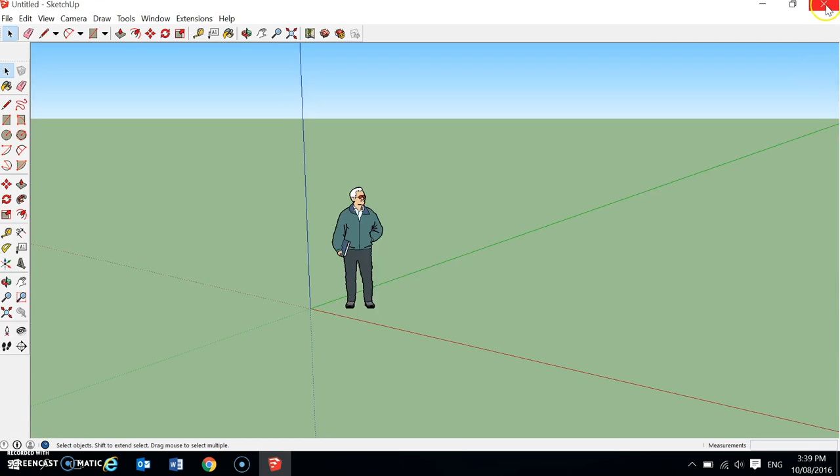Oops, sorry, that's chosen the wrong one. If that happens, you need to launch it because it jams, and then close it and relaunch it. There's some weird glitch with the software, so we'll go do that again.

Choose template, click in this little scroll here, and you're looking for the woodworking millimeters template. Select it, and once selected, go to start using SketchUp. Wait for it to load.

You'll notice that if you use your wheel, it will scroll in and out. If you squash that wheel down, it'll allow you to orbit around the workspace. You'll also notice you have a green and a red axis, the X and the Y, and a blue one, which is the Z. The green and red are your two horizontal planes, and the blue one is your vertical plane.

I'm just going to start by drawing a rectangle. Click in Shapes, click once and drag. You'll notice in the bottom right hand corner you should have your Dimensions tab, which gives you all the dimensions you need for your drawing.

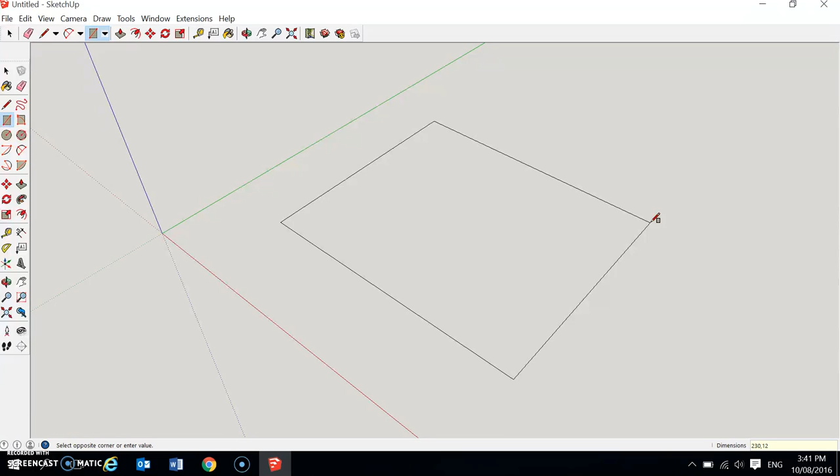I'm going to type in the dimensions. I'm going to make mine 230 millimeters. You can see the numbers appearing in the bottom corner. I'll do that again: 230, and then we're going to separate that by a comma and put in, say, 125. Then press enter and it draws the rectangle.

It's pretty small, so we're going to click on this zoom extents button here and it'll zoom right in so we can see our drawing.

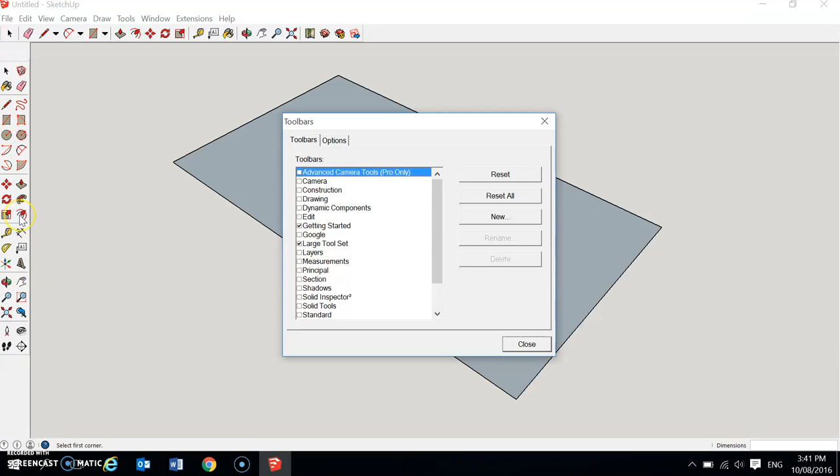Okay, the next thing we're going to do is click on the offset command. Now if you don't have that there, what you need to do is go to View, go to Toolbars, and if you click on Large Toolset, you can see my large tool sets here. It'll appear in this little column here. Just click on Large Tool Set and then close.

Alright, so I've got it in two spots. I'll choose this one, Offset. Click inside the rectangle and drag in, and then type the thickness of the timber you're going to use. In this case it's 12 millimeters. Press in 12 and press Enter. And now you've got the thickness of your timber for the box.

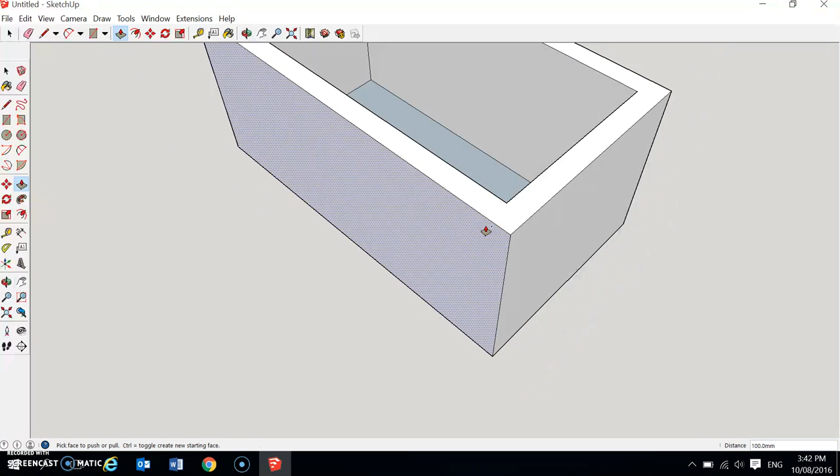Now we could just pull that up now to the height, say it's 100 mil. But we haven't actually detailed any joinery and we want to do that. So I'm going to go Control Z to undo, and I'm actually going to draw that in.

So I'm going to pick my line tool and draw in my rebated butt joint. I'm just going to go on face, connect at the end point, and type in the distance, which is going to be half the thickness of the material, which is 6 mil, and enter. Type in the distance and enter, and then click on the end. So there's the first part.

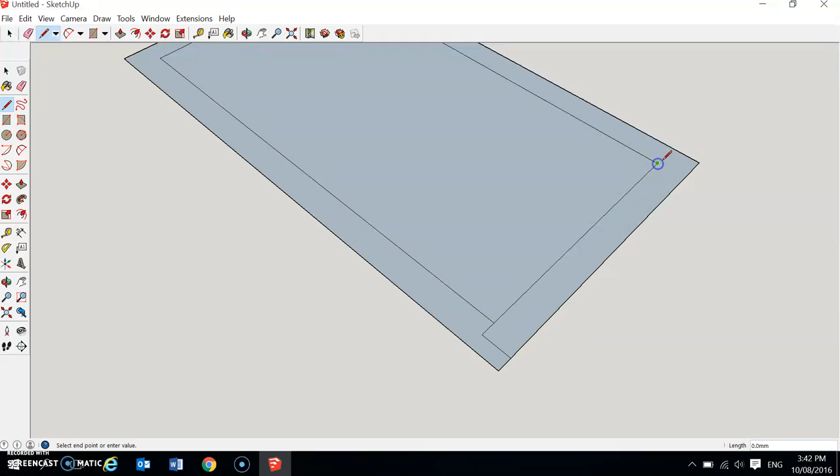I'll do the same on here. Now it should lock in at 6 mil because it defaults to your previous settings. So in this case it locks in. You can see it gets attracted and gives you an end point. I can do the same on this end as well. So I'm going to zoom in.

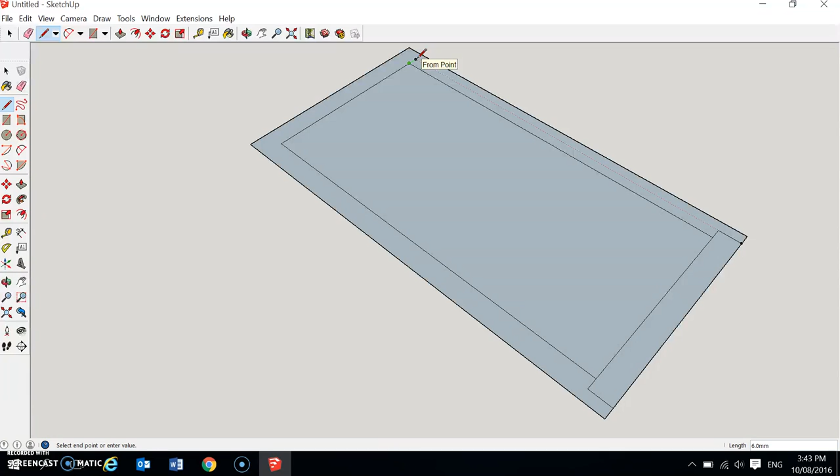From point, click. And I'll do the same at this end, on face, 6 mil, so it's giving me the same distance. So now when I go to pull up, it will pull up individual components, so I can pull them as separate pieces. Okay, I'm just going to undo that.

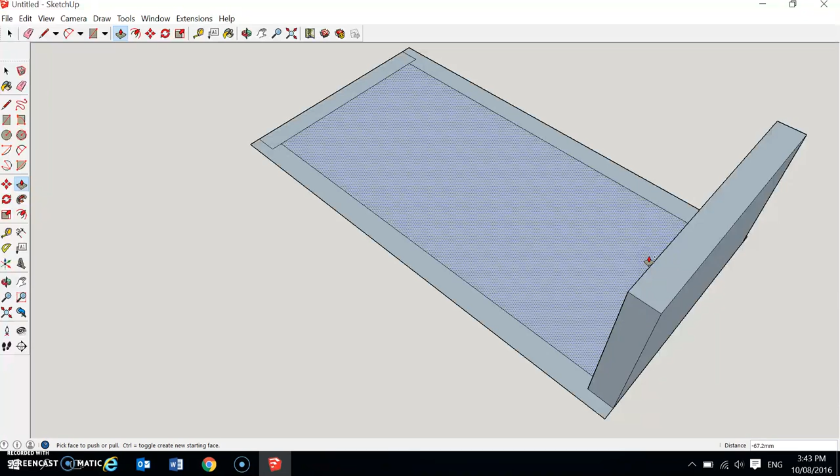I'm going to type, pull the two edges up first, 100 mil, enter. 100 mil, enter. And I'm going to pull up the end one, 100 mil.

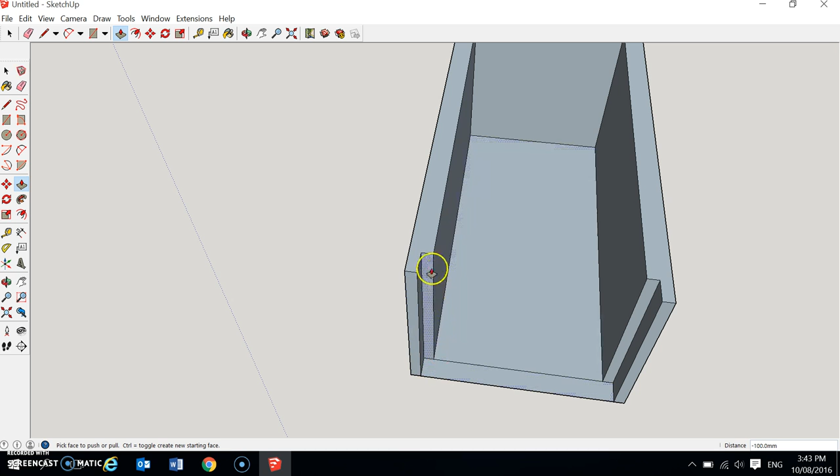Now, if you wanted a sliding lid, obviously you're not going to pull up all the way to the top because you want the lid to slide in and out. So I'm just going to pull it up 10 mil from the top, so I've got enough room. Sorry, 8 mil from the bottom, sorry, that's right.

10 mil from the top and then 8 mil from the bottom, so 18. So I'm going to pull that up 72 mil. So 72. Sorry, that should have been 82. Bad maths, 10 mil, 10 mil. Okay, so now I've got room for my lid to slide in and out.

Now I want to put the groove in. So I'm going to go to my tape measure and go from the top down, and I want to come down 10 mil from the top, so I've got a nice thick bit of material there that's not going to break off. So I'm going to type in 10, and that's going to be the bottom of the groove.

So I'm going to go back to line and draw a line on my first guide, and I'm just going to continue all the way around because the groove goes all the way around. Click. And when it's on the red axis, it's parallel.

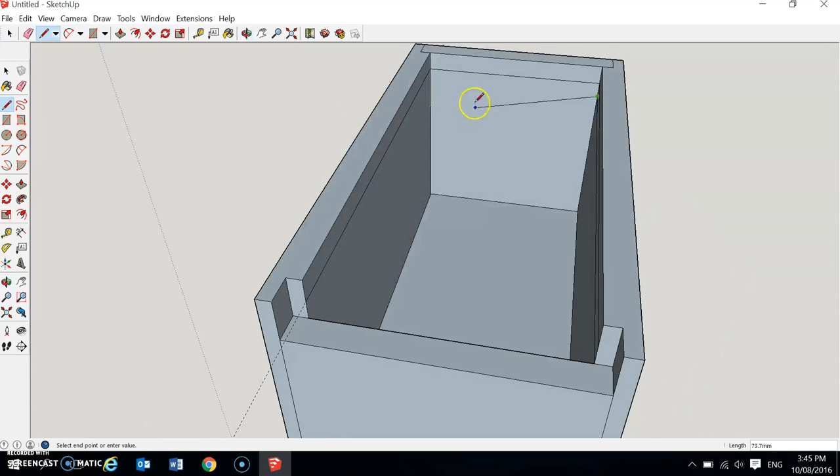So now I want to do my bottom groove. So once again, it's on the red axis. Go around, in this case it's the green axis, and should be back in the red.

Okay, so it's actually filled in the top, which is okay, I'm not too worried about that at the moment. If I want to get rid of that, I can just go to my selection tool, click that surface, press delete, it gets rid of it.

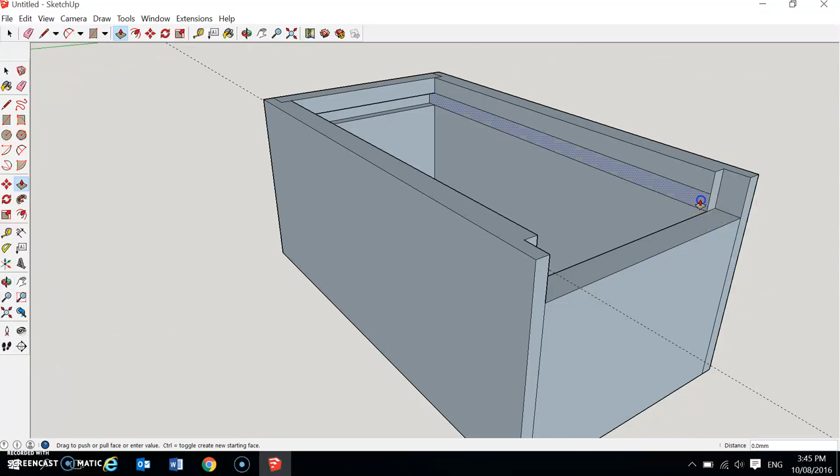Okay, so now I'm going to push that rebate because I want to put a groove in there. So I'm just going to go back to my push-pull tool. I'm going to push in 6 mil, which is the distance of the rebate butt joint. 6 mil, I'm going to do the same there, 6 mil. Type in 6, and this last one, 6 mil. Okay, so now I have my rebate all the way around.

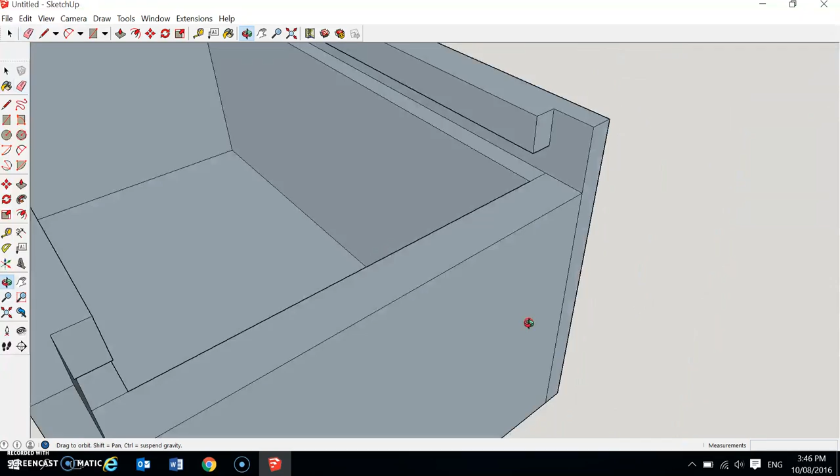I'm going to choose the erase tool to get rid of this guideline because I don't need it anymore, and I don't want to see this line here because it just doesn't look right. It shouldn't be there, so I'm going to get rid of that. And there I have a detail of my box with the joinery in and the sliding lid.

So later on, I can just come back. Oops, I don't know why that happened, but I'll just close that. Later on, I can just come back in and draw my box lid. All right, so have a go at that, and then the next tutorial will show you how to put your box lid in. Okay.